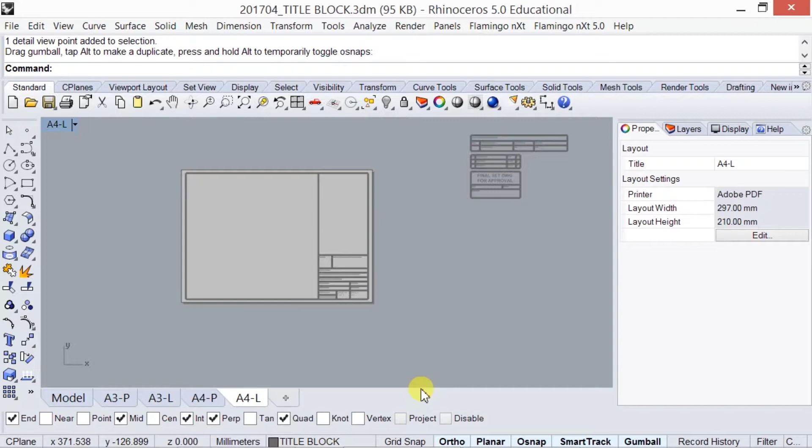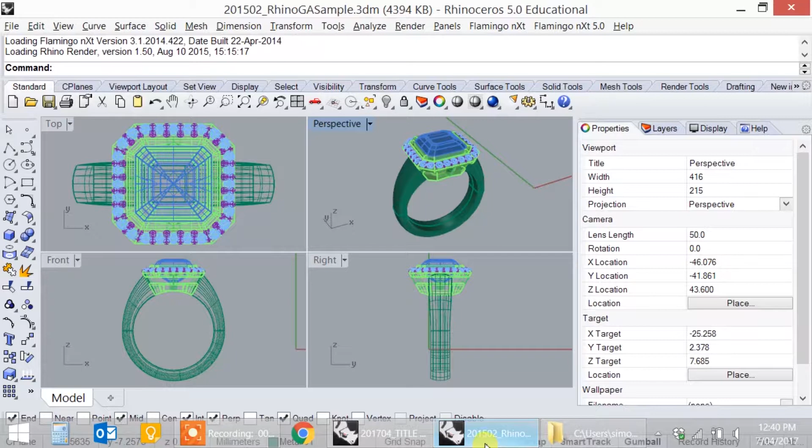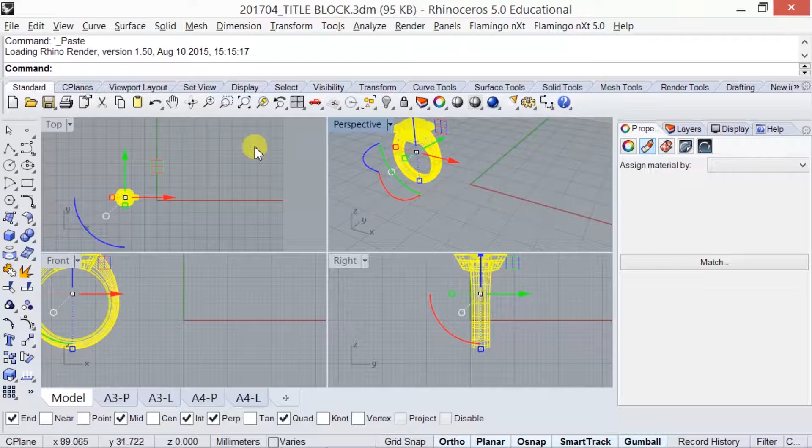So I've opened this file as a separate file. You can open up numerous different Rhino files, but that means you have different copies of the software open. If I go to the bottom of my screen, you'll see I've got the template here, and I've got this particular file open. So I'm just going to copy this with Control C, like putting it onto a pasteboard, and go to my model space. Make sure it's in the model tab, and paste it into my model space in the template title block. So file, save it again, make sure you don't save over your title block. We'll just call it drafting.

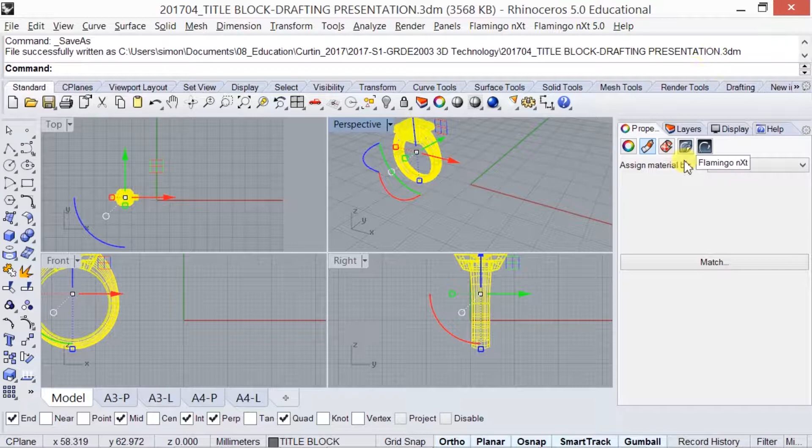Okay, so you don't have to do anything, just watch if you can. Under drafting, there are some really useful tools that help you guys out in regards to creating technical drawings.

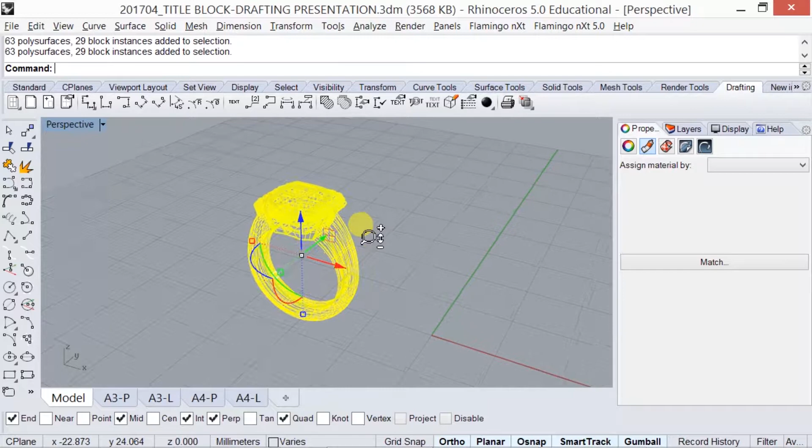I'm going to select this object, all the components related to it, and find the best perspective viewport for this, so that it describes the object. For example, if I did this, it's not the best way to show the gallery on top, so I'll probably do a 3/4 view. Make sure it's in the center. That's probably the better view of this to present this particular object.

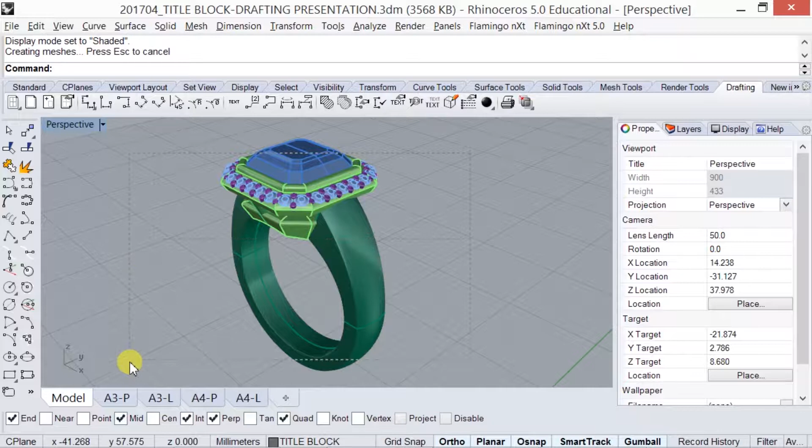Select the whole thing and click on Make 2D. This is magic. What will happen is the computer takes what you see here and converts it into line drawings.

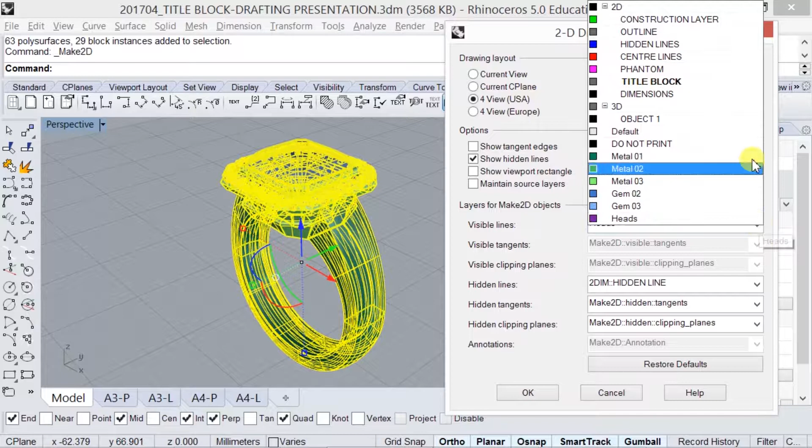On your handout here, it describes the settings. We're going to use 4 View USA, which is third angle projection. We're going to show hidden lines, part of Australian standards, to show what is behind the object and what's through the object. Down below here, we need to make sure all visible lines go to my outlines, and all hidden lines go to my hidden line layers.

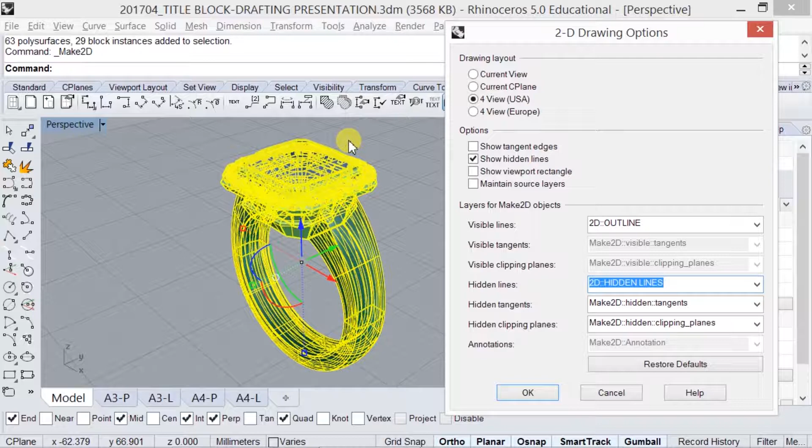So what that's doing is creating a whole set of technical drawings for you. It's going to create visible lines and hidden lines, and then take on the settings you created about an hour ago. So all your outlines, the colors, the line weights, the thickness, the dashes, that's in the layers. You're telling the computer that all the visible lines go to that layer and all the hidden lines go to that layer. When I press OK, it may take a moment.

So these lines it's creating are actually in vector format, which means you can now select it, export it, and send it into Illustrator, so you guys can actually digitally render these objects and provide top, front, left views in vector formats. So you can use them for presentations, really handy. Makes the presentation look a bit more professional.

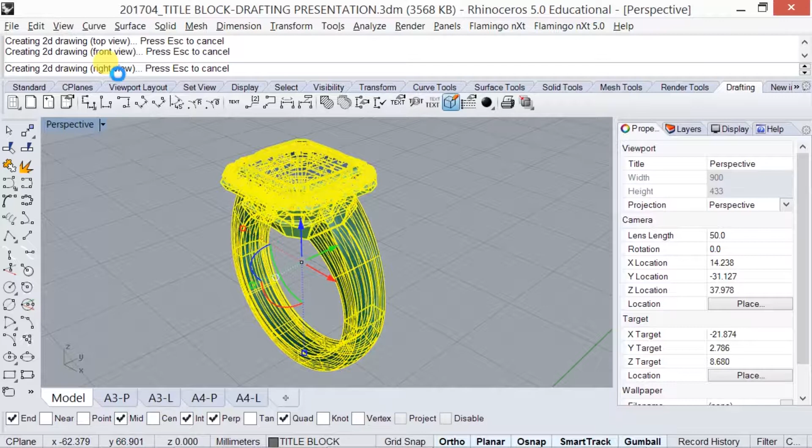So there's your drawings in top view, all created in its own layers. Really handy, really quick process.

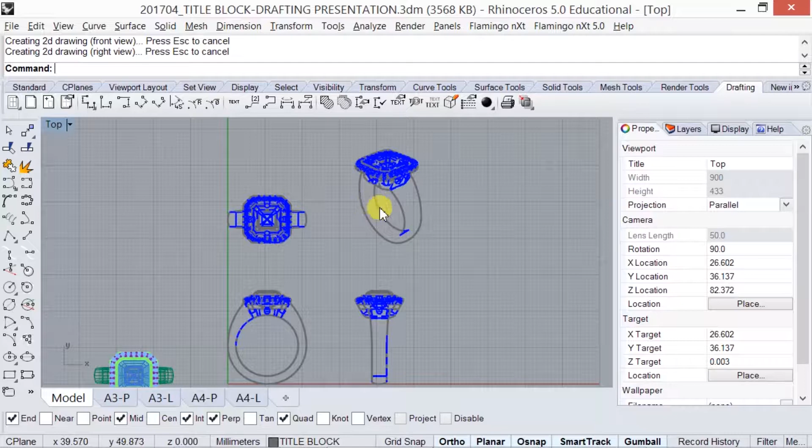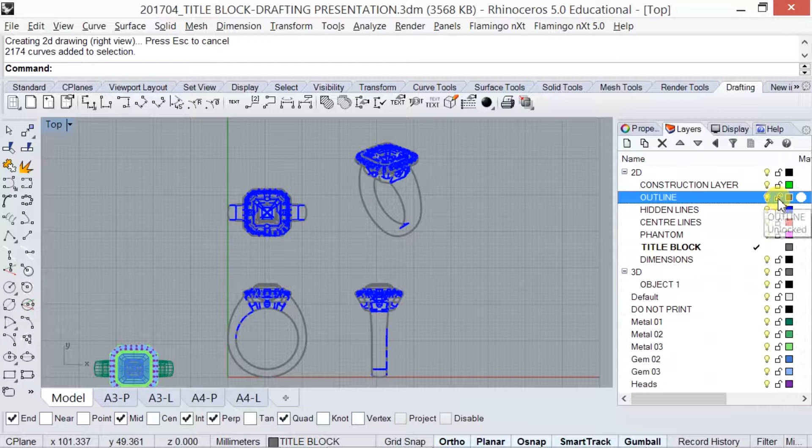Just as a reminder, note that in your perspective view, you don't need your hidden lines, so I'm just going to delete them. To do that, I'm going to lock my outline layer. If I don't have it locked, selecting just the blue lines is pretty difficult unless I go through and select them all. It's easier if I just lock it so I can get access to it. Select the blue lines, hit delete, and that's your drawing done.

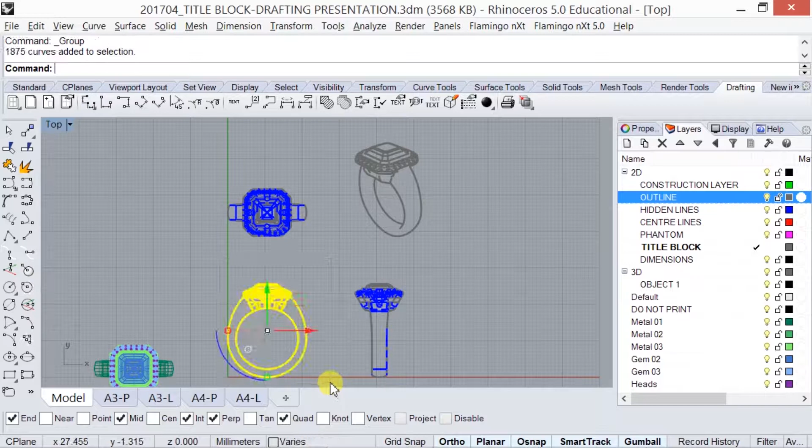I tend to like to group my views, so I select that and go Edit and Group, Edit and Group, Edit and Group. So technically that is your technical drawing done.

All you need to do now is bring it up on your layout page. A3 landscape, do landscape. You'll notice that the 3D object is visible.

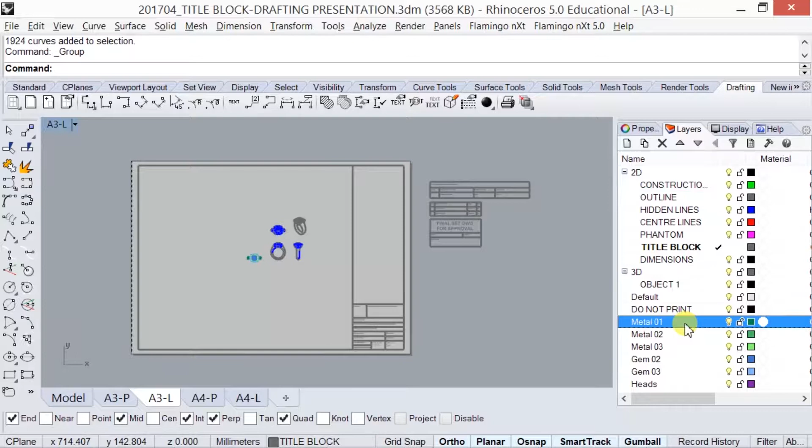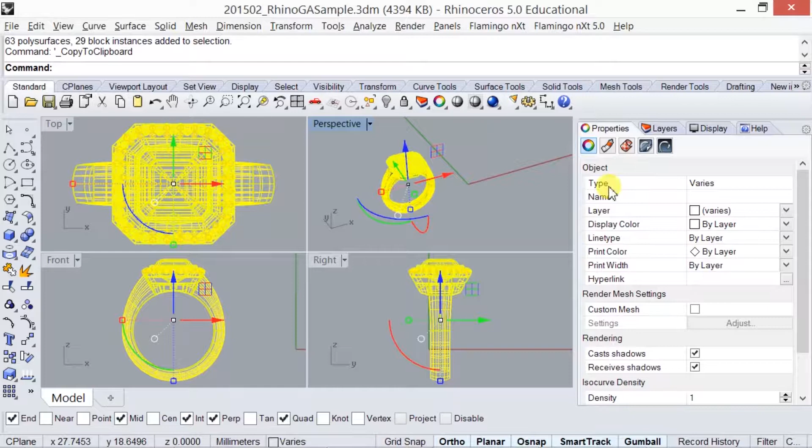I'm just going to move all my... so it moves all the. So when you copy and paste, it takes on the object's layering system and pastes it into your new file. Going back to my original object, these are all the layers that all the components have. So your shank, your stones, they're all part of a layer system.

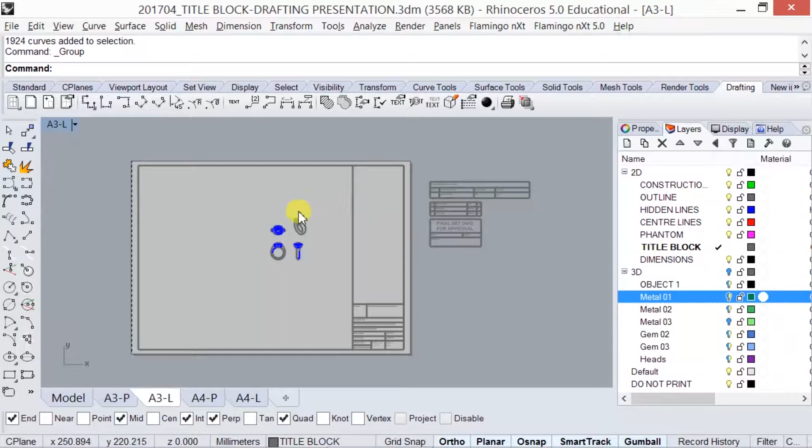So when you bring it over to your other ones, it brings it along with it. I've moved them all into my 3D layer and turned that off so it's not in the way. So that viewport currently is 1:1. I'm going to make it bigger. So that's now 2:1, making that drawing easy to see. You can see the details much better. But you'll see that's been cut off on the viewport.

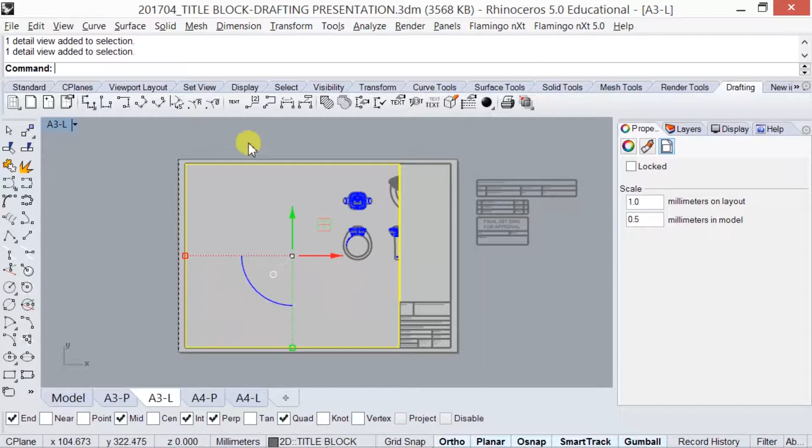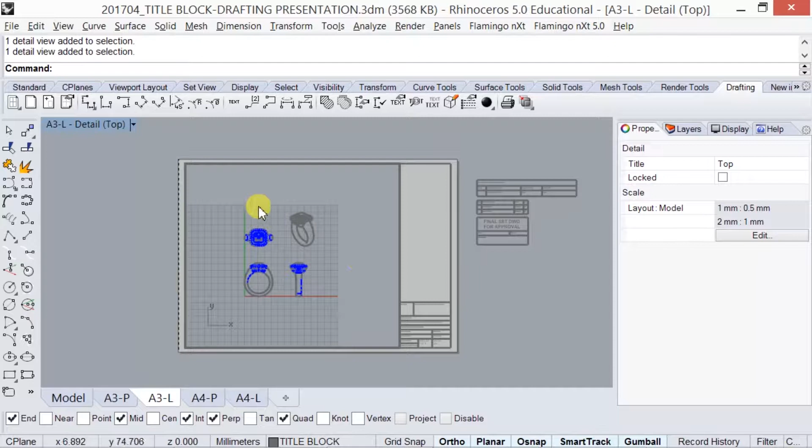If you want to move your objects, leave them where they are in the model space. Double click, so you can see that currently it's a light color. If I double click on that viewport, it gets a darker color. You can pan by holding your right click down on your mouse, which allows you to pan your view. So now I'm actually in model space, accessing it via the viewport. I can still click on the objects and do exactly what I was doing in model space, but viewing it through a window. I want to group that.

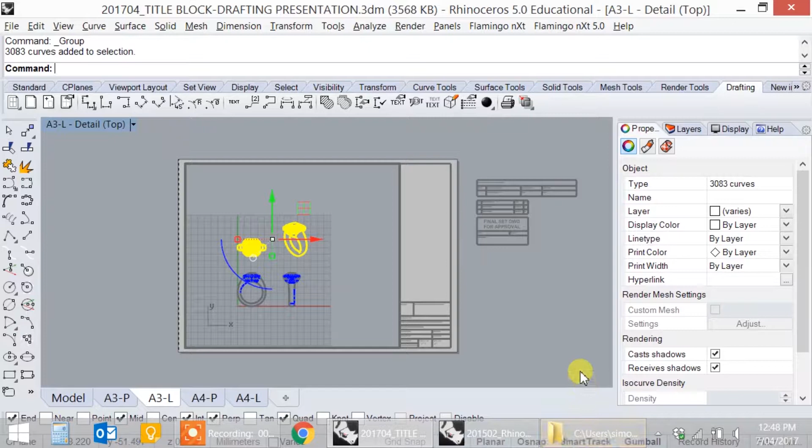So if I want to, there's a lot of real estate on this page, so I want to spread these views out. Just make sure you work with your gumball turned on, and we can drag them up and across. The reason why I said use the gumball is to make sure you're moving things parallel to the other viewports. If not, if this is off to the side, that's not a true technical drawing, because these need to align to each other. So that needs to center to this particular view. Just move them in pairs, that's the best way forward.

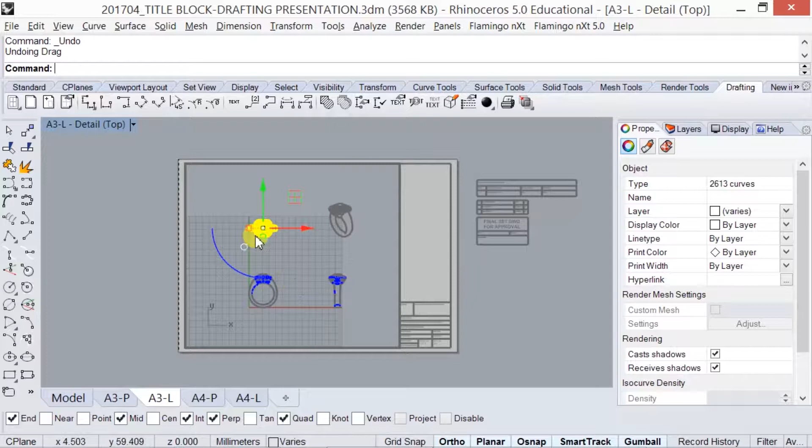And then we'll adjust and adapt so it looks pretty centered. There's enough room for me to put dimensions in, and it's the right spacing. Just eyeballing it so there's enough space for me on the left and right side.

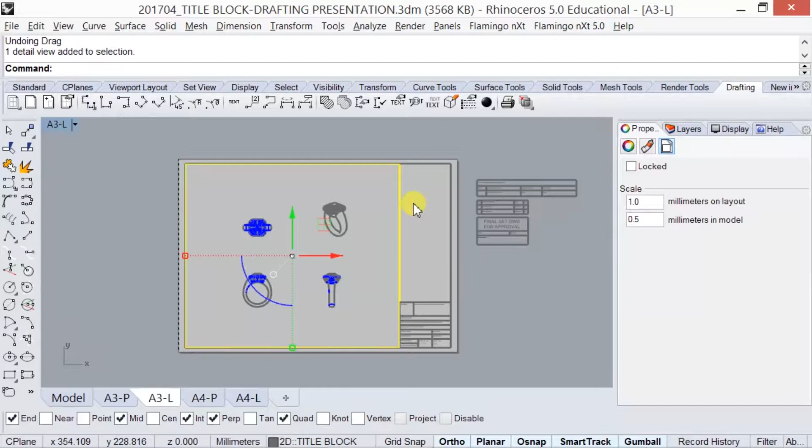To get out of the model space, just double click and get back into the layout space. I tend to like to lock my viewports. A common theme or common error that happens is when you're working so close to your object like this and you double click on it and zoom in.

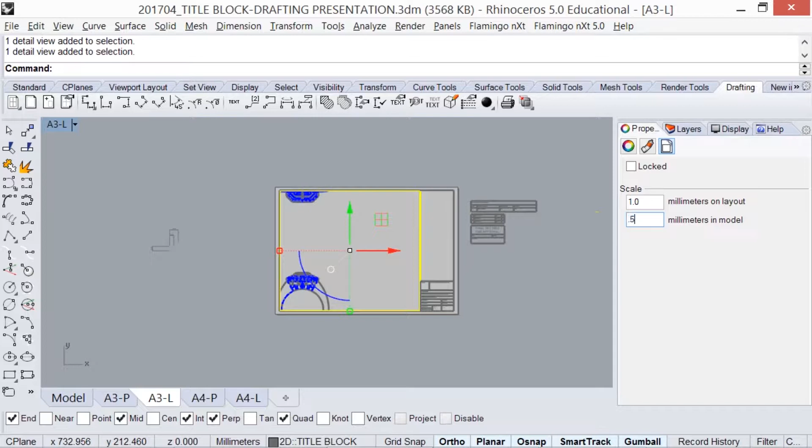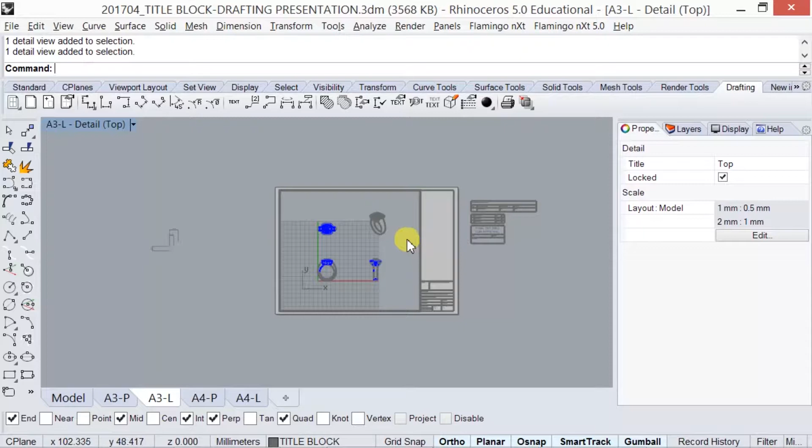That's where the mistake is going to be made. So definitely, once you've set up your view where it's positioned and the scale, always lock it. When you lock it, it locks it from zooming in and out. You can still access the model space and move things around afterwards, you just can't zoom in, so you can't make that particular mistake.

I think I'm just going to show you guys up to that particular point, and afterwards it shouldn't take too long. Next thing to put in is your spacing rectangles to put your dimensions in, these little things. And then afterwards put your dimensions in, and then put your notes in afterwards.

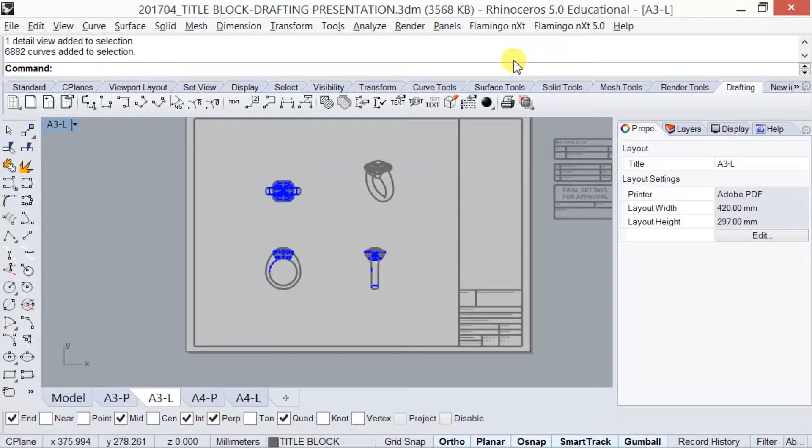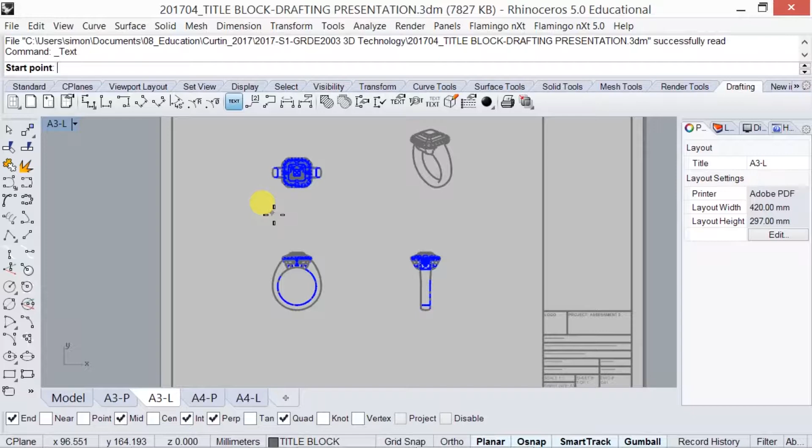So next thing we can do is placing titles. On each of the views, I like to include titles underneath each of them just to be clear of what they are. So if you go to your Drafting tab and go to your text, these particular titles are going to be in bold and standard capital cases, and also uppercase.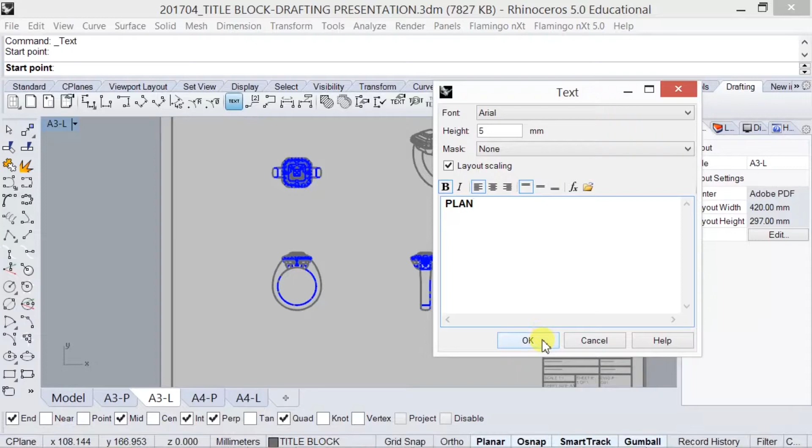So uppercase, bold, and 5 mil. If you just click in this particular space, stick with your standard font, using 5 mil as your font size, and type in. I like to justify it to the left and to the top. Just make sure we are in the right title blocks, and move them into your dimension layer.

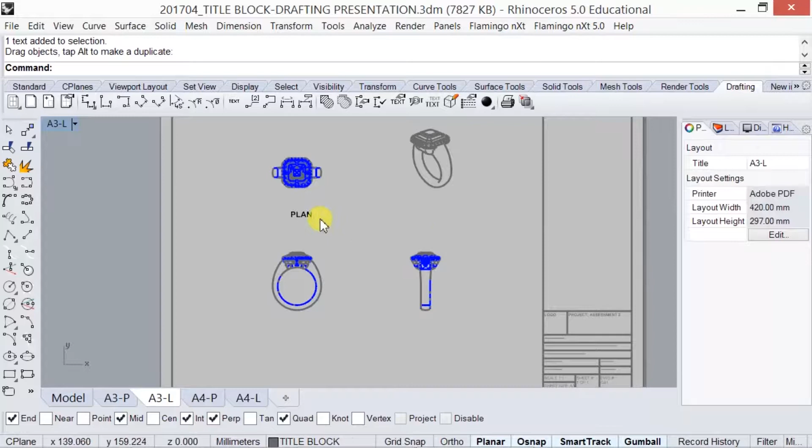Should have done that at the start. So click on dimension. Quickest way to get the other four would be just copy and paste.

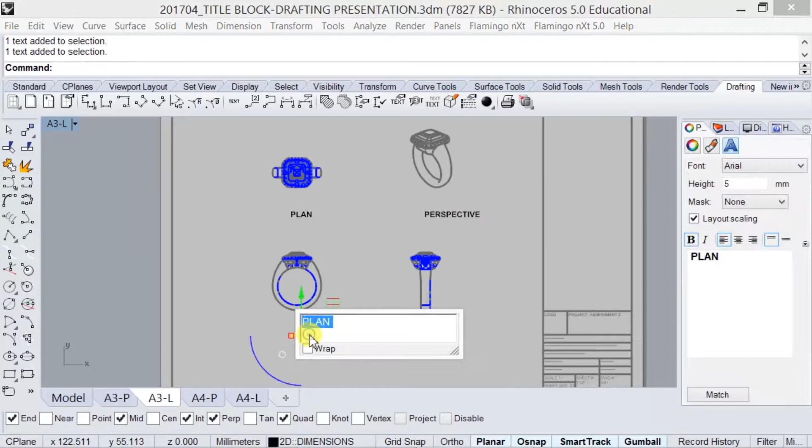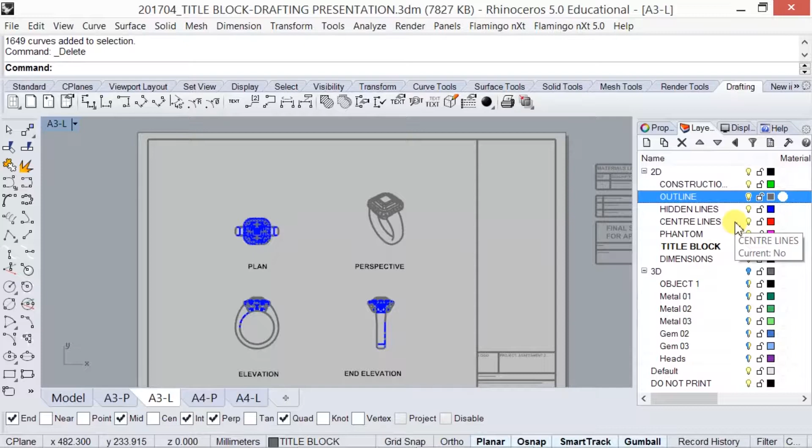So the next step we're going to be doing is placing center lines. Make sure we activate your center line layer. Center lines are there to help create fillets, rounded edges or holes. For example, in the middle of this particular section where the hole is, we'll need to create a center line.

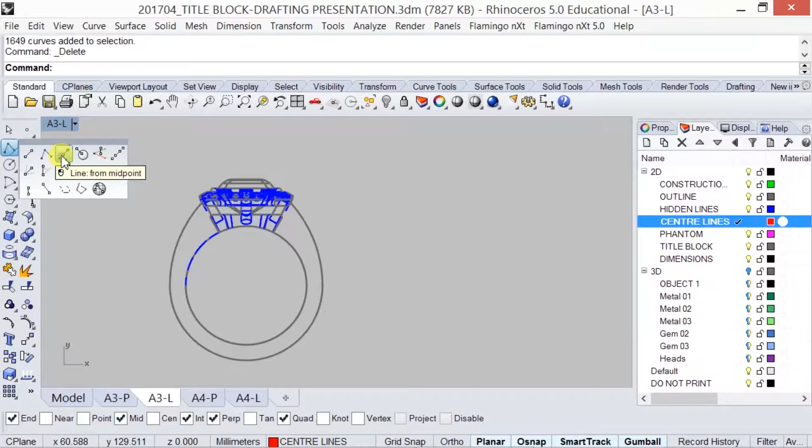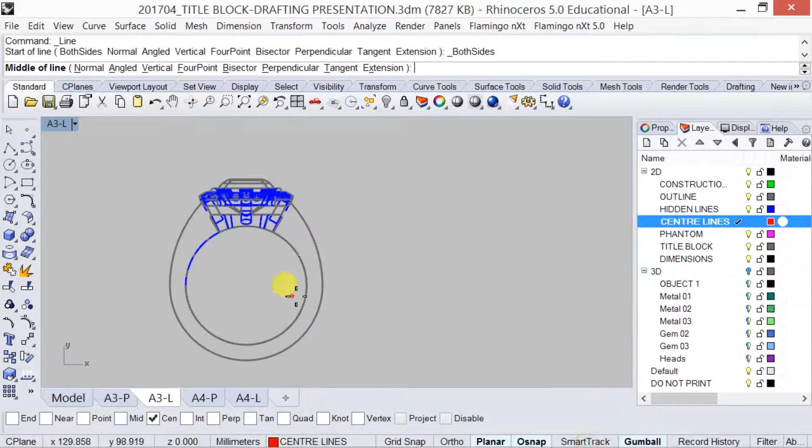So we're going to create using lines from midpoint. Turn on your center of the circle, so you can go to the center of the circle to pick up the center point. If you go to the edge, you may want to turn off some of the SmartTrack. You can see if I hover around the outside edge of the circle, you're going to pick up the word center. And turn on your ortho.

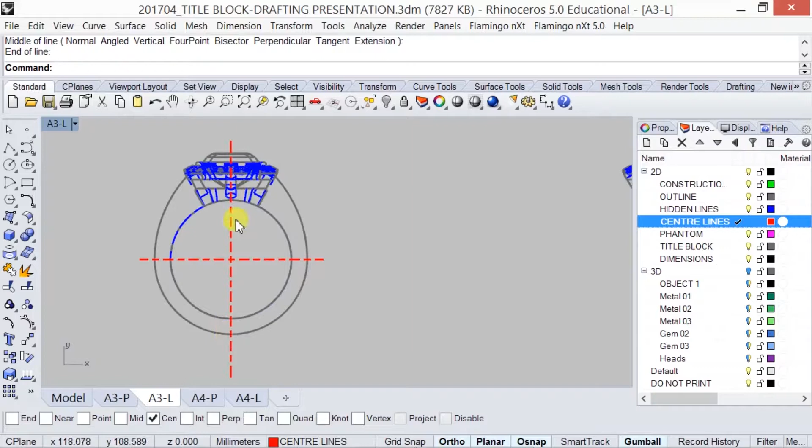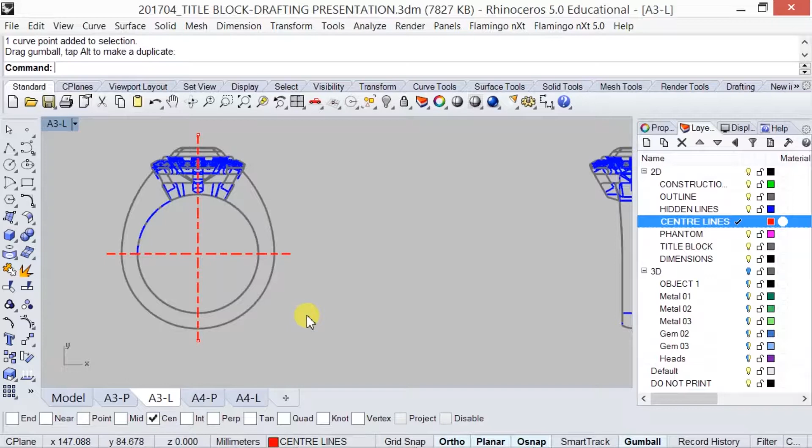Do that again, just for the vertical ones. The extension line on the center line shouldn't go too far out. You can see on the top it looks okay, but on the bottom it's sticking out too far. So I would suggest you select that, turn on your control points, grab it, and just move it up. Okay, so that's your center line for that hole.

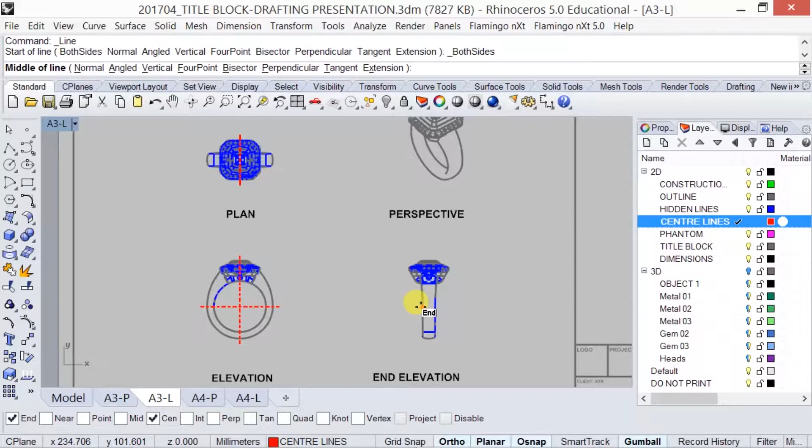So wherever there is a fillet, for example up the top here, I would suggest you put one. Okay, so it's hard to figure out where the center of that hole is from there. Just create one here.

Can I get you guys to just look on your handouts? So next up we're going to look at doing is setting up your dimensions, or having a set system for your dimensions.

If you're looking in your handouts, your dimensions are really neat. They're neat in a way where the spacings are all consistently spaced. So you see how the first row of dimensions lines up to all the ones on the bottom, and then the second row of dimensions, so the 4.7 lines up with the 4.7 here, and then the 25.6 and the 12.8 from the top view to the front views all line up in a particular way.

So the spacing between each of the layers of your dimensions is 15 mil, and the amount of layers of dimension depends on the object you're creating. There's no right way of how many layers you create. It's just the more you put in, the more information you're going to convey to the person looking at it. I'm just going to quickly show you how that is all set up.

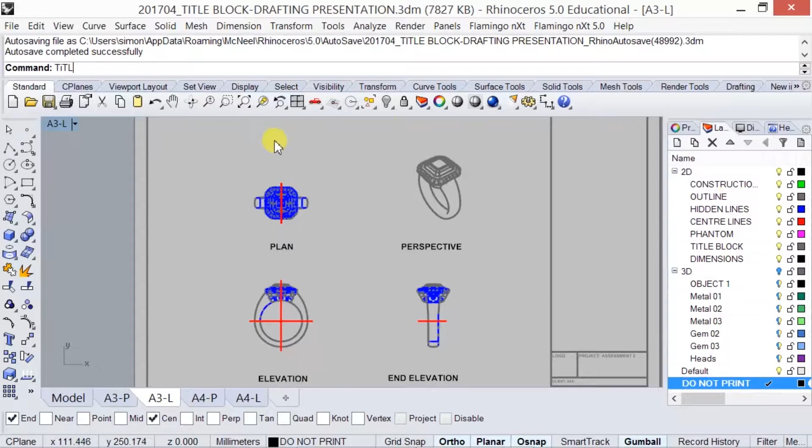We're going to create these boxes on here. I'm just going to show you how I do them. I'm going to activate a layer called Do Not Print down the bottom here, because these boxes will not be printed. They're just there as a guide to help you create your dimensions.

So I'm going to zoom into my object, and I'm creating boxes that are touching the edges of the object. Ignore the center line in this situation.

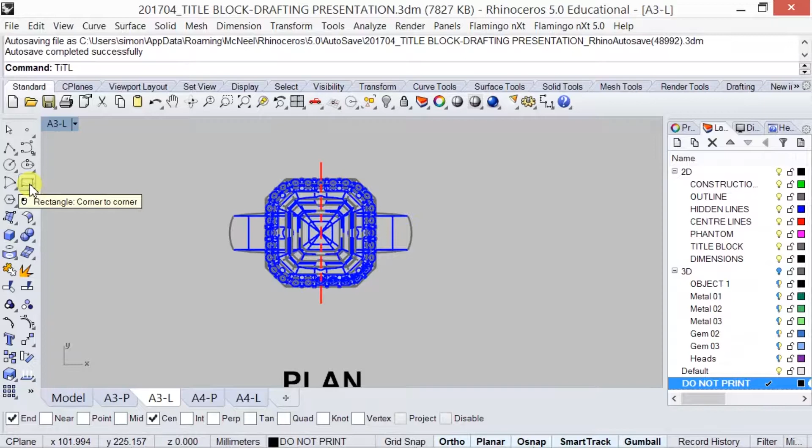So we're going to turn on your SmartTrack. Okay, so the SmartTrack, I will show you what it does.

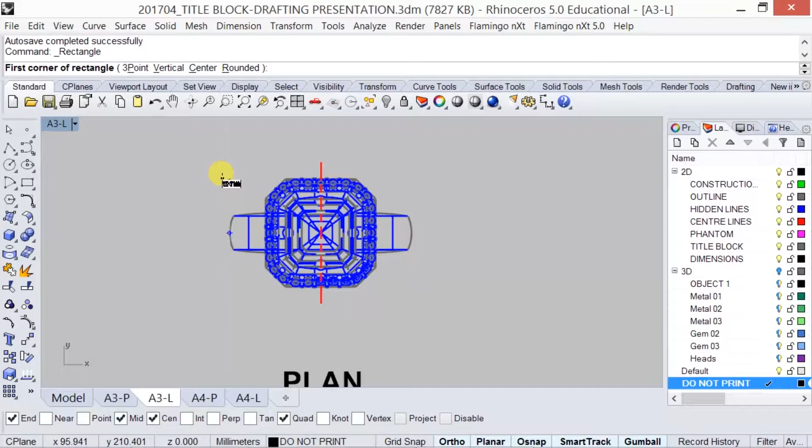So we're going to create a box. Instead of clicking on this part here, I want to click somewhere up here where the left edge of this object and the top edge of the setting is touching. If I hover over that point, you see there's a white dot, a little white marker. If I click, move my mouse and hover on that corner of the setting, you'll see your lines now have a new point to create from. So if I click there, that's where my first point of the rectangle is going to be.

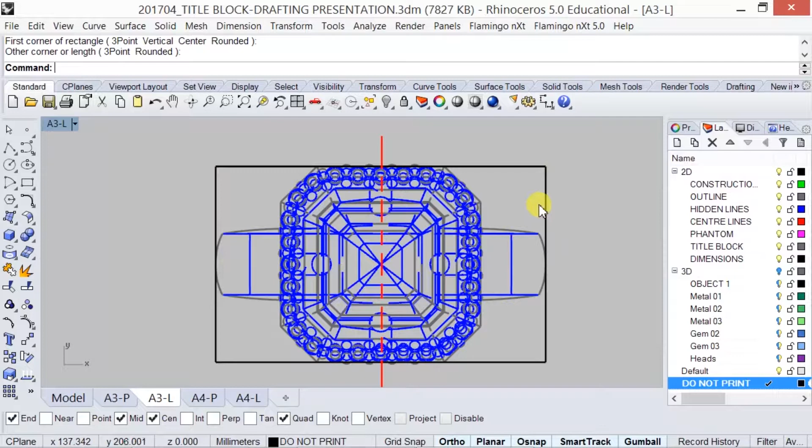I'm going to do exactly the same thing, hover above the right side of the shank and the bottom of the setting, and then click there. So this box now is at the maximum edge of the object. The next one, do the same thing, left edge of the shank, top edge of the stone. Do it again. If those white dots aren't popping up, you just have to do it again.

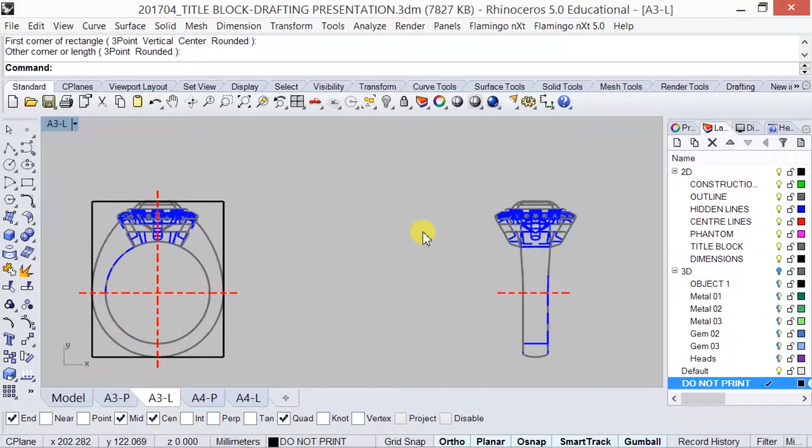Your dimension should only sit on 2 views of your drawing, okay? Don't put them everywhere. Try not to double dimension. So if I'm telling you the height of this object is, let's say, 25 mils, I don't need to know that same information on the right side. One is enough. You don't need to double dimension.

On my drawing, I've just got the top view and the front view, so I don't need anything else. There's nothing in here that I need to know that I can't see from these 2 views. In certain situations, yes, you have to, because on the right side or left side there may be stuff you can't see from the other 2 views. Then you dimension off that, but try to keep it on 2 if possible.

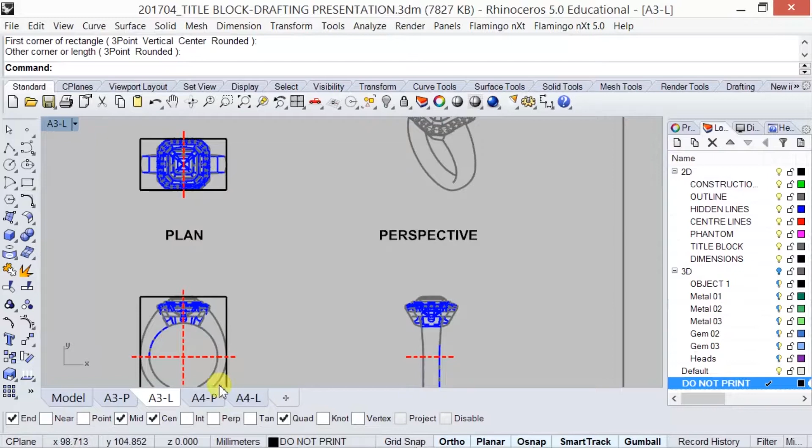So I'll get you to create those rectangles on the plan and elevation view first. Make sure you turn on your Do Not Print layer.

So the next step we're going to do is, I was talking about how each layer of your dimensions are 15 mils apart. So how do we make them look 15 mils apart? These are going to be your reference points of where you snap your dimensions to. So the next step is offsetting these boxes. Offset is a command, and the distance to do that is 15 mils.

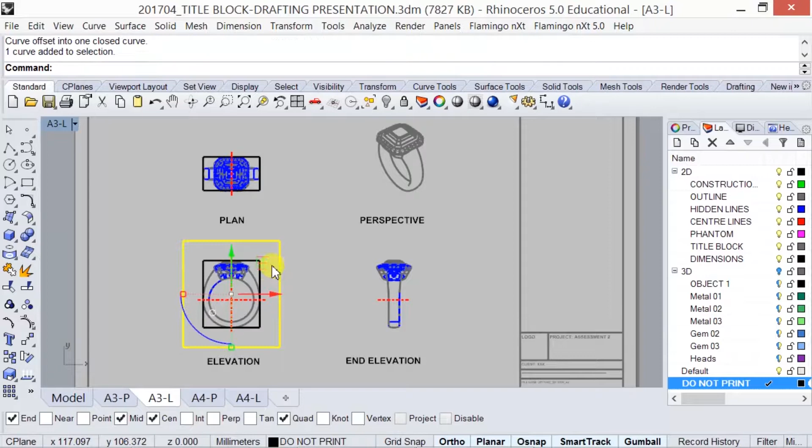Okay, so you create your first line of layers, second line of dimensions. Those boxes are now generated for you so that when you create dimensions, you can actually pull things and snap them to those particular objects or those boxes.

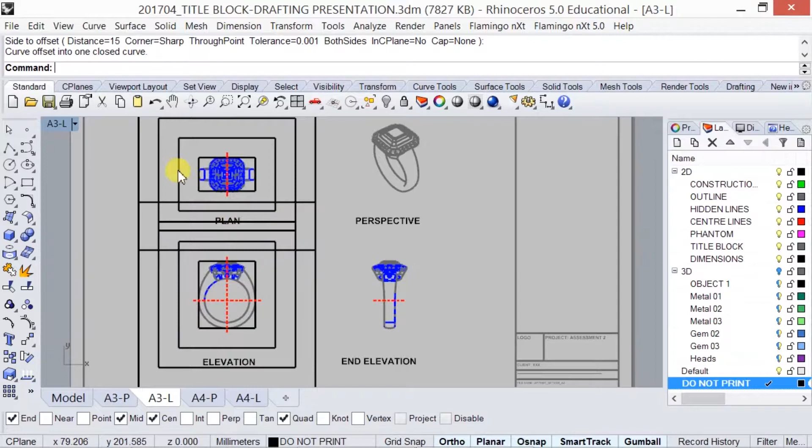Just don't worry if they're overlapping for now. If you look on your plan view, there are 3 layers going sideways to the left. What we could do is actually move this title later on to sit up snug at the top there.

So can I just get you guys to run the offset command on these? So the next part, once you have your rectangles for your spacing of your dimensions, is to now put in dimensions.

So the question is usually asked, where do I need which dimension? How do I put it down, and which one do I use? If you don't know what dimensions are, like where do we put it down, it comes back to you as a designer maker, always thinking about what do I need to communicate.

So for example, one of the main things is the ring size. We need to know the ring size. You need to know, if you're making this piece, what is the shank thickness on the bottom in comparison to the shank on the right. Your setting sizes, the stone sizes, all that information needs to be communicated. So your dimensioning is there to indicate that. So in your drafting tab, you're going through.

Okay, so the main thing we're going to be using is your lineal dimension. You also have your angle dimensions, your radius and diameter dimensioning.

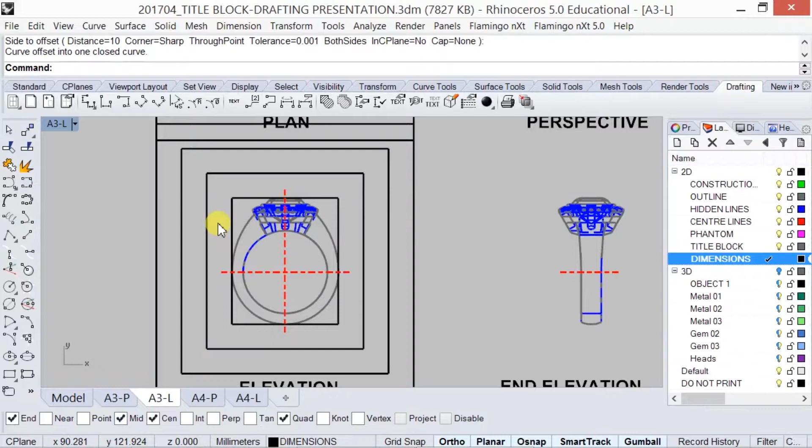So I have activated the dimension layer. Make sure the tick is on there. So the rule of thumb is starting from the inside out. For example, let's dimension the setting here.

So the first layer I'll look at dimensioning is, so I've clicked on your lineal dimension. I'm clicking on that part.

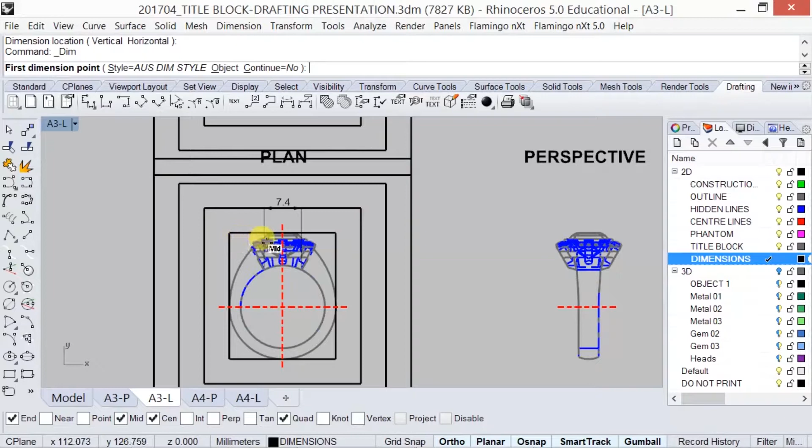Next one I'm doing is the outside, the furthest most point of the setting. So if I'm making a setting, I would roughly know what size it is. I'm clicking on the perimeters and then snapping it to the rectangle. Move that out of the way.

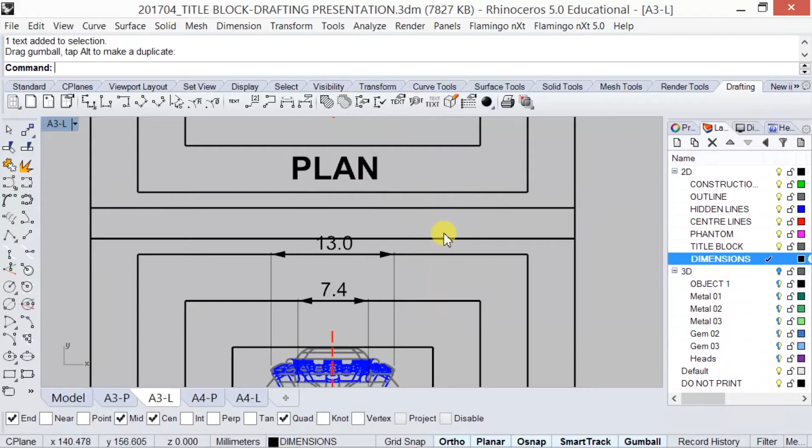The next one is the overall size of the ring. Click on the same tool, and then we're going to the next set. Okay, so that's the way of doing dimensioning.

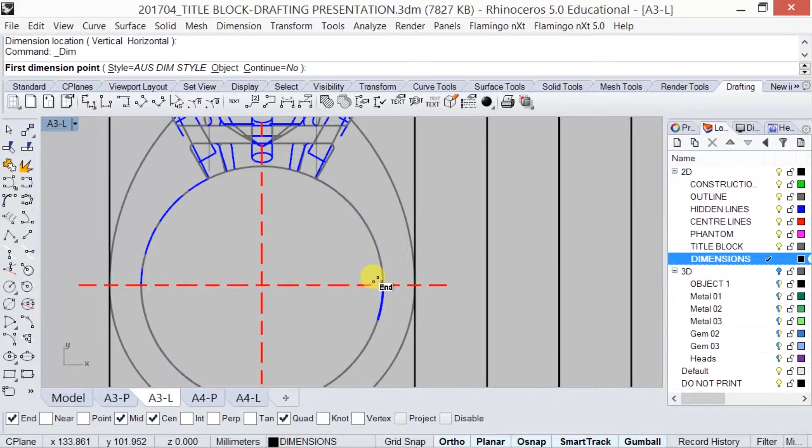You can also go back in afterwards and edit your dimensions. For example, just to provide information about the thickness of the shank, the rule of thumb is not to leave your numbers or your arrows in the middle.

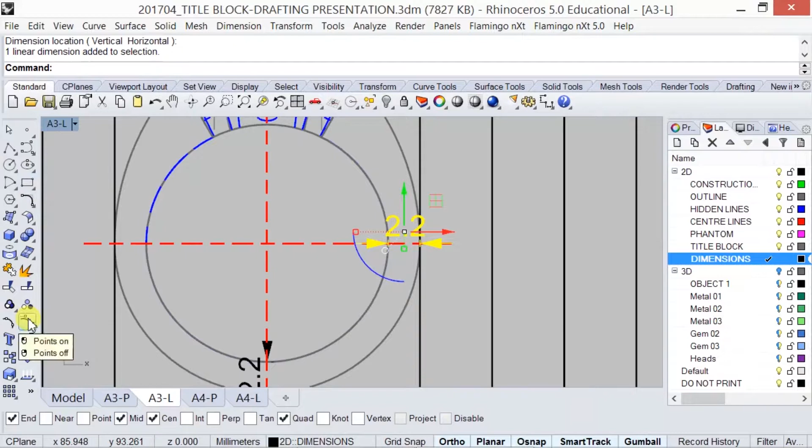So the same as your lines, you can edit your dimensions by selecting it and going to your control points. F10 for quick shortcut keys. So then you can grab the control points and move them out of the page. On my handouts, you'll see that these numbers are not sitting on the object, and the arrows are on the outside of the drawing.

The reason for having the objects or the dimensions off is that it's not as distracting, so you can identify what is the object and what is the dimensions.

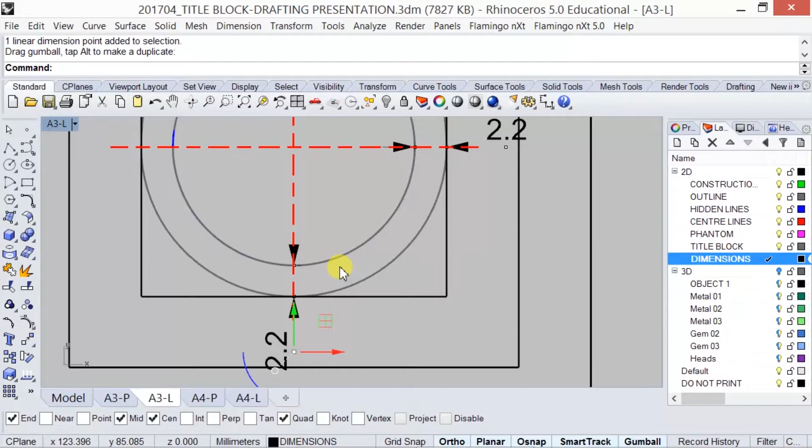For example, this line here, you'll see that 7.4, the leaders of your dimensions go right through the setting. It's not a really good idea. So what I tend to do is turn on your control points again, select these two, and just grab them out.

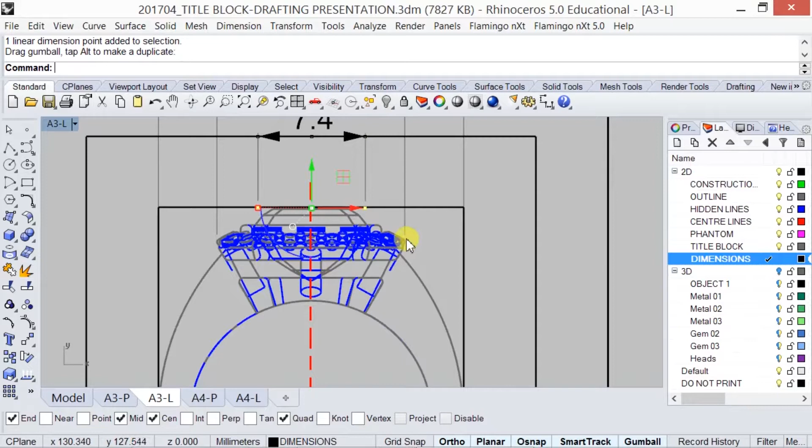These are fine because they're not touching, and this one is fine, it's not touching. So if I turn off my do-not-print, these ones here, they're quite close. You can actually turn on your control points and just drag them out a little bit so they're not touching.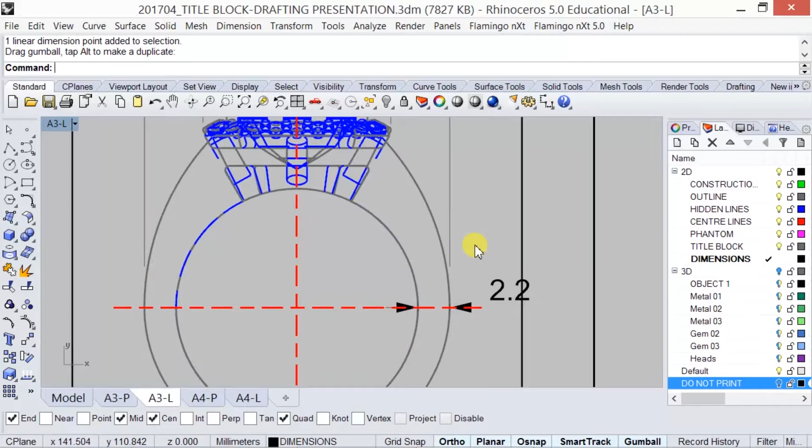And that's it for the dimensioning. Okay, so apart from your linear dimensions, which you guys saw, the other thing you may want is, for example, an aligned dimension.

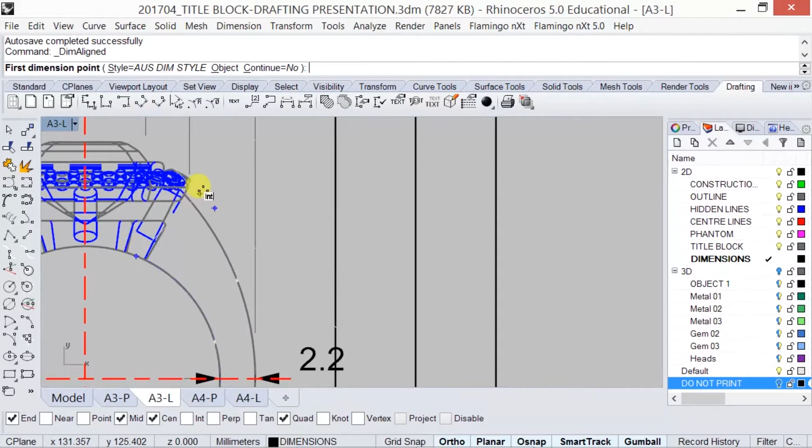For example, I want to dimension this edge here. If you click on that corner, in that corner, you can get that diagonal edge. Other things would be diameter and radius.

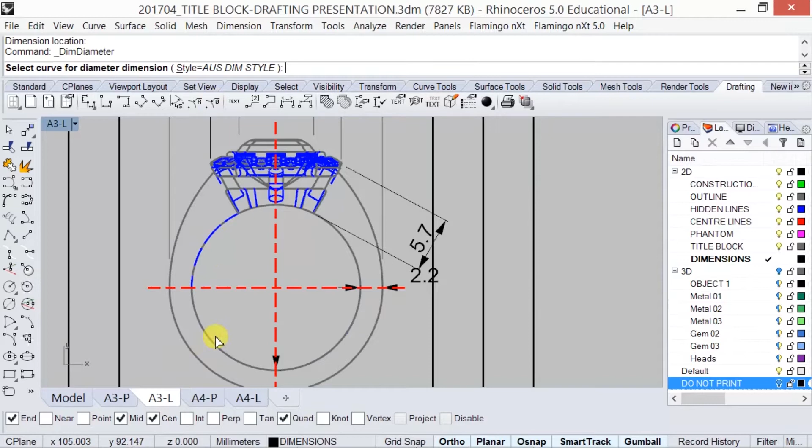So the difference between a diameter and a radius is, you use diameter wherever there is a hole or a disc, so a complete circle. Can be negative space, can be positive space, it doesn't matter. For example, the ring size, diameter of 16.8 or 17.

But if you were doing, for example, this particular arc here, then you would use a radius, because it's not a full circle, it's a portion of a circle. Okay, this is not a perfect round curve, so you can go from one side of 3.8 to another side of 5.2, so you may not want to create a radius for it.

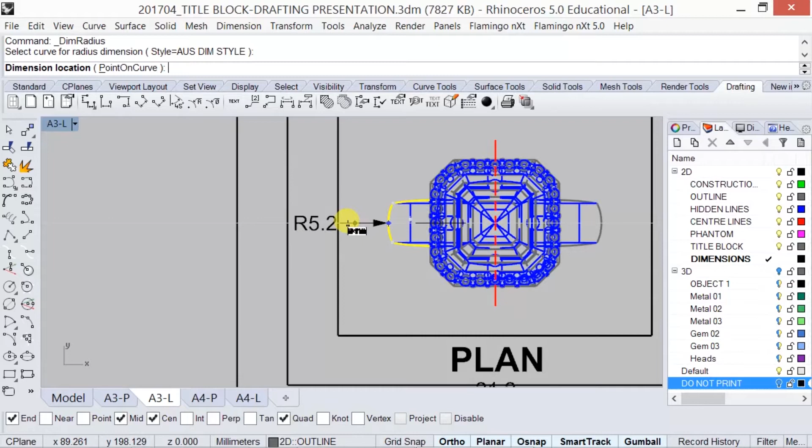So I'll just leave that for now. Is there any other portion of a circle? No, okay, so we don't have any radius in here that you need to specify.

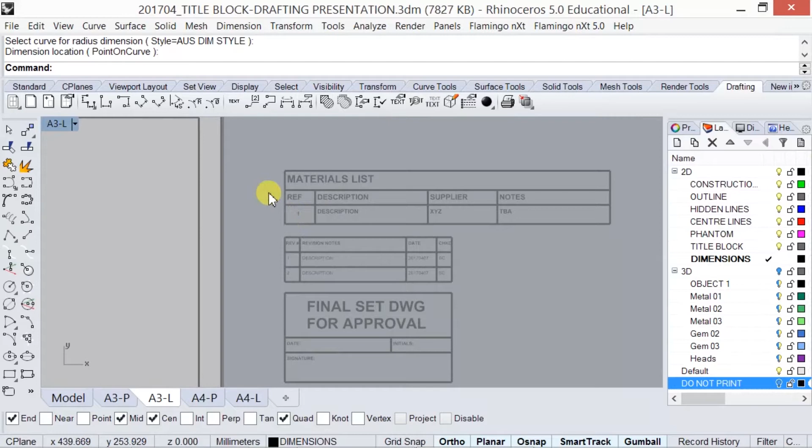On your handout, you'll notice that under your materials list, you have material 1, and then you have 2, 3, 4, 5. So let's move that across. We'll copy them down to create a couple of different options.

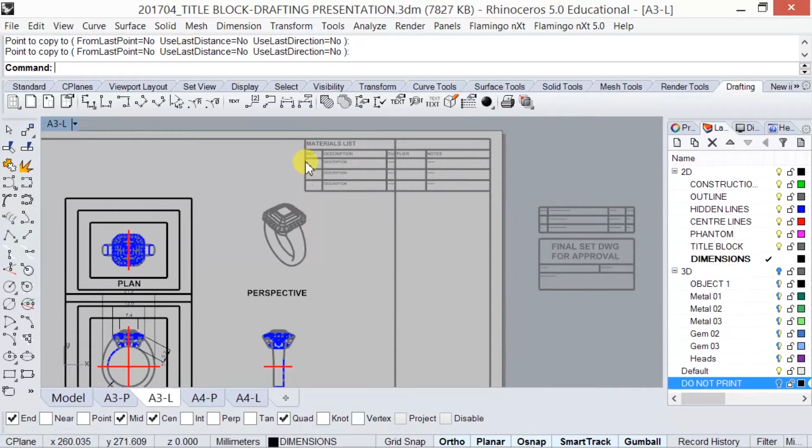If your materials list is growing too large and interfering with your perspective, then obviously move it out of the way so it's not too cramped to the edge. In this situation, I'm just going to leave it for now so I can get to the point.

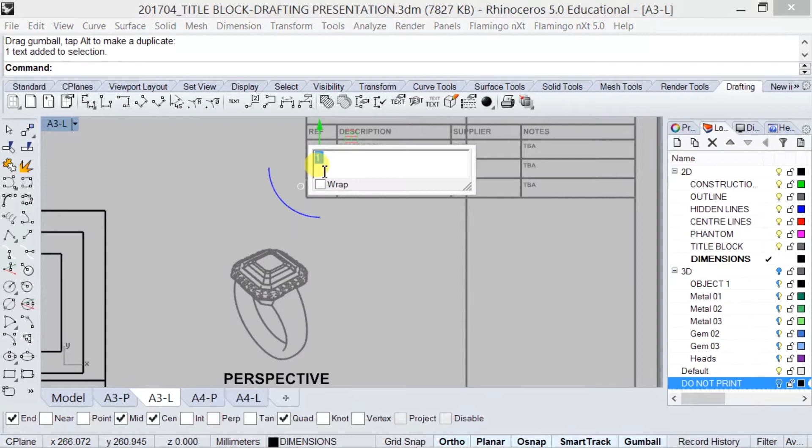So reference 1, reference 2, reference 3. Okay, so let's say number 1 is for the shank, and I'm going to create an arrow here called a leader. Point to that, come up at about 45 degrees, and then have a little horizontal leader coming out at 3 mil.

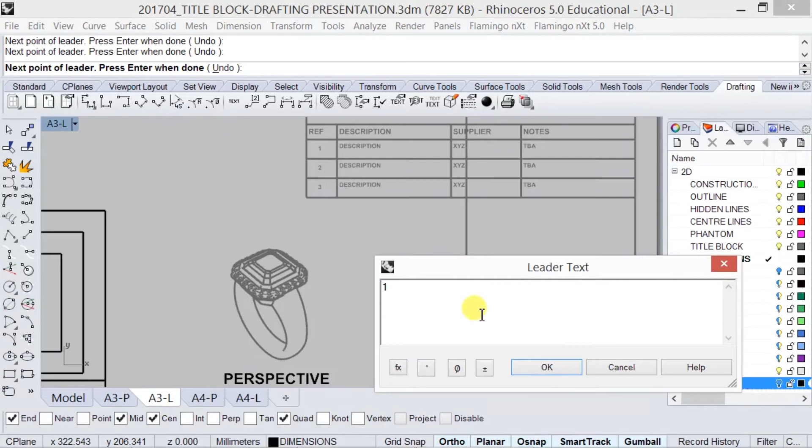Okay, and then left click on that and press enter, and it will give you a text box. So we're just going to put 1 as my first reference. The easiest way to do number 2 and number 3 is I normally just copy them. 2, 3.

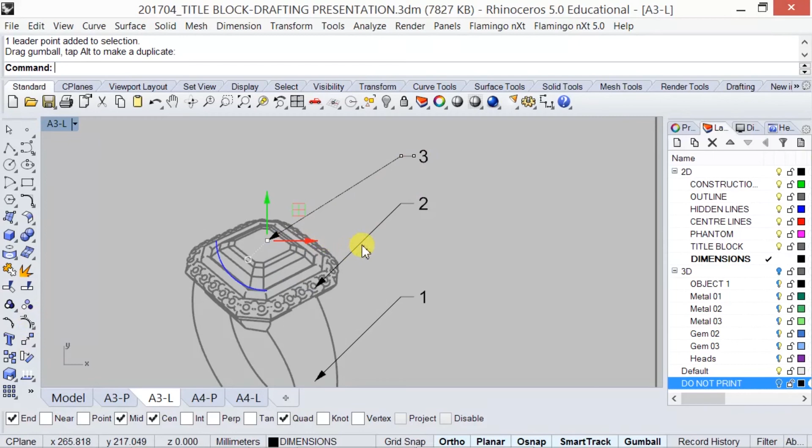Okay, so once you've created them, you can select them, turn on your control points. So if 3 is identifying the stone and 2 was identifying the setting, just make sure you point them at the right location. And there's your majority of your thing.